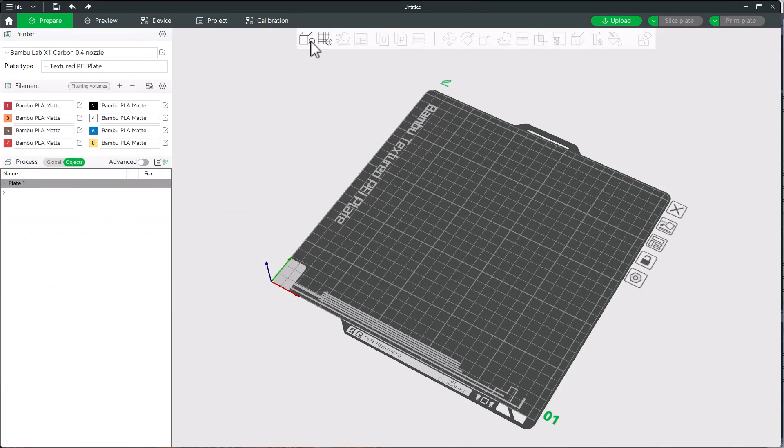Now, if we look at the size of this, we'll see it's 200 by 200 by 2.92 millimeters. So the first thing we want to do is slice this with the right setting. So I'm going to go into here under global, and I've got an actual setting for my 0.04 HueForge Bambu. And that basically shows the layer height of 0.04, first layer height of 0.16, and standard stuff like the fact that it's got 100% infill density. And I also can move the prime tower around. I change these numbers as I need to.

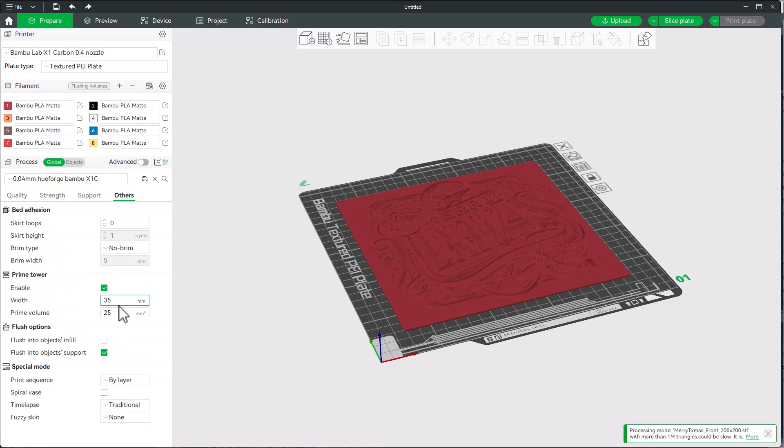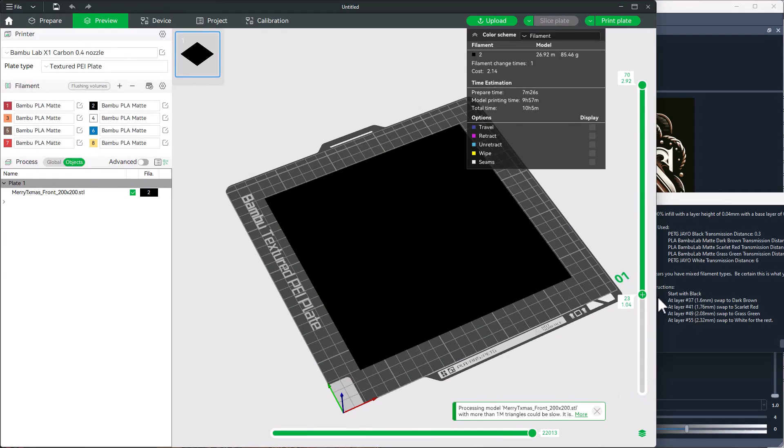So with this the way it is right here, the first thing I'll do is select it and go into the object, and that's going to be black. I would select it and hit 2, and that changes that to black, and then I'll slice it. Okay, now that it's sliced, we haven't changed anything yet. We just want to make sure we set all these up. So at layer 37, it says to change to dark brown. So we'll go up to 37, right click here and say change filament, go to the dark brown. And then at layer 41, scarlet red. So we'll go up to 41. We're going to change filament to scarlet red, which is this one.

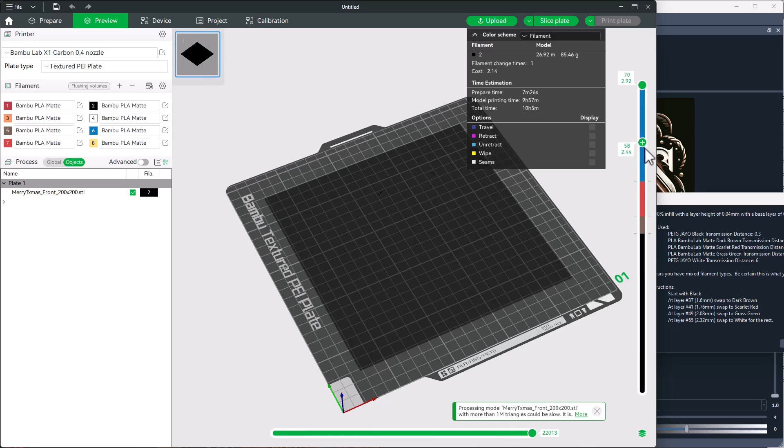And then at layer 49, grass green, it will say change filament. We don't have grass green here. Let's just make it blue for now. And then at layer 55, we're going to make that white. And then we'll reslice it. Okay, now that we're done, let's just go ahead and pull this all the way down. And as you can see, we've got this purge tower that's in the middle of it. That's what this area is, but I'm not going to worry about that right this second. I'll get to that in a second.

What I want to do is look at this and see we have blue instead of green. And what I'm going to do is turn off the seams, right? I don't want this stuff. And let's just look at it from top down. So let's move this around and let's grab a screenshot of this area and let's save it. Notice that total time for printing is 10 hours and 10 minutes. It's a long time. So what we'd like is all this black stuff to be printed at 0.2, or at least the first layers before things start printing at 0.04. And so let's talk about how we do that.

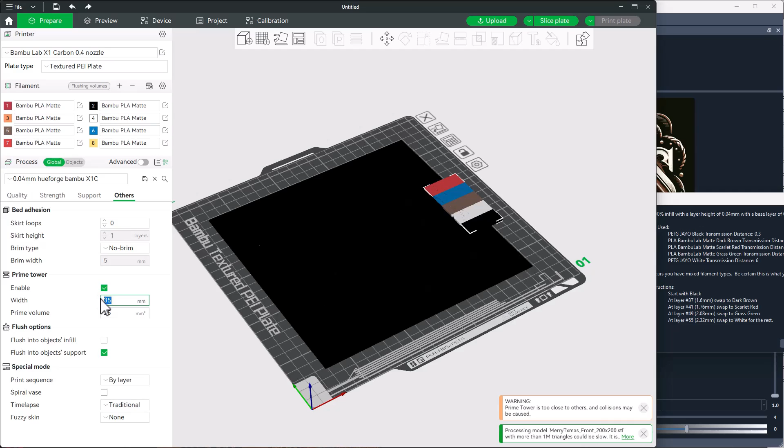I'm going to go back to this, and let's just move this over here. We're going to turn that into a prime tower. The width, let's make it like 8. Yeah, something like that'll fit. I think it'll fit. Yeah, that'll fit. And then we want to make this maybe 10. So there you go. So the prime tower fits fine there now.

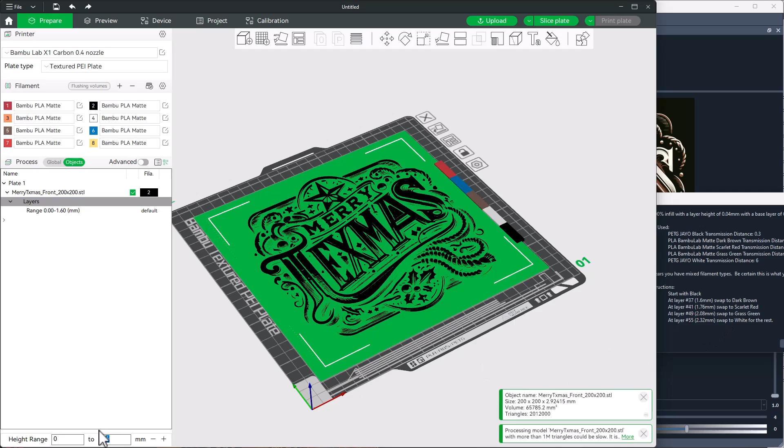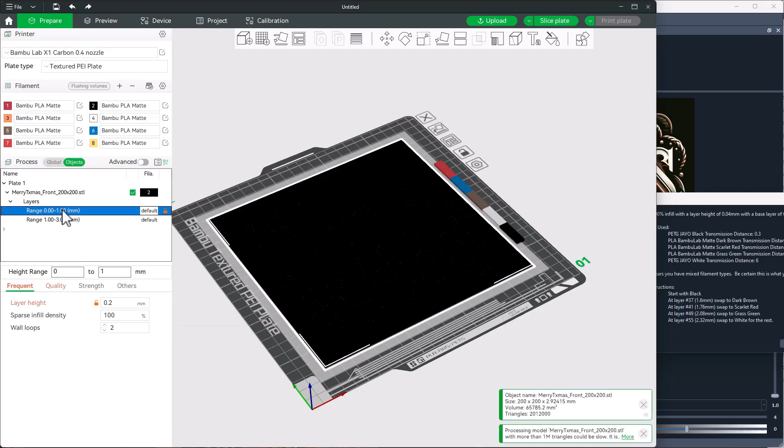Okay, so what I'm going to do is I'll be in the objects mode, and I'll right click and I'm going to say height range modifier. Just do 1 millimeter. Okay, so let's make that from 0 to 1. From 0 to 1, I want to change the layer height to 0.2. So now I need to add another modifier. And this is from 1 to 3. As you can see, that's already set at 0.04. So that's set correctly. This one's set correctly. So now let's go ahead and slice it again.

Okay, now we're done. And notice that our printing time has jumped down to 8 hours and 20 minutes. And let's rotate this and take a look at it. And if we compare it to the one we took a picture of, which was 10 hours and 18 minutes, we knocked off almost 2 hours in printing. And you can see it's actually exactly the same. Everything here is printed exactly the same. So from here, I can just go ahead and print and everything is good.

So just wanted to let you guys know about this technique. It's a really good technique for optimizing the thickness layers. Hope it helps you. And thanks to Cyanide Sugar for suggesting to use the height range modifier in the Bambu Slicer.